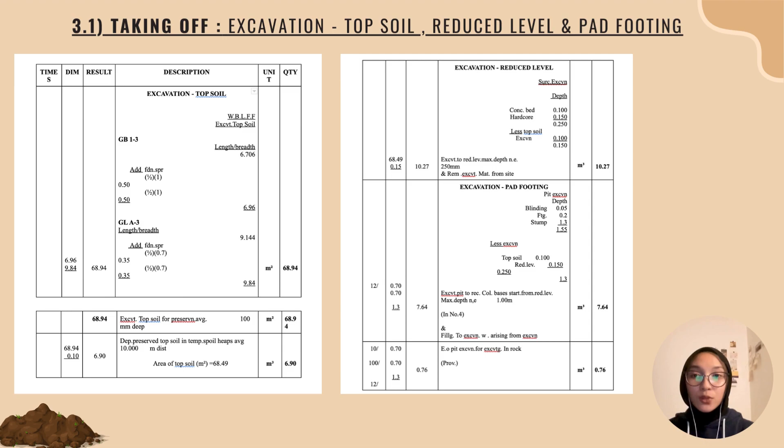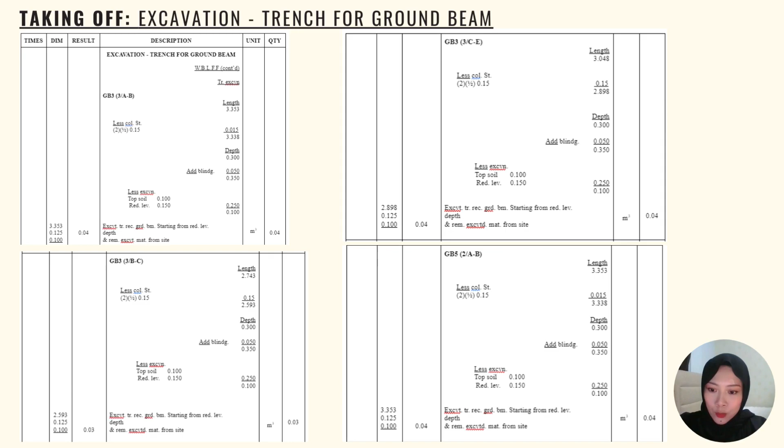Excavation, trench for ground beam. All beam sizes are the same, with width 125 mm and depth 300 mm. The quantity from the first beam, with length 3.353 minus column stump and excavation of topsoil and reduced level, is 0.04. Next is 0.03. Next beam GB3 slash C to E is 0.04 and GB5 slash A to B is 0.04.

Our next beam, GB5 grid 2 slash B to C, with length 2.743, minus column stump, excavation of topsoil, reduced level and blinding, results in 0.03, and GB9 grid B slash 2 to 3 is 0.04. The total excavation for ground beam is 0.22 meter cube.

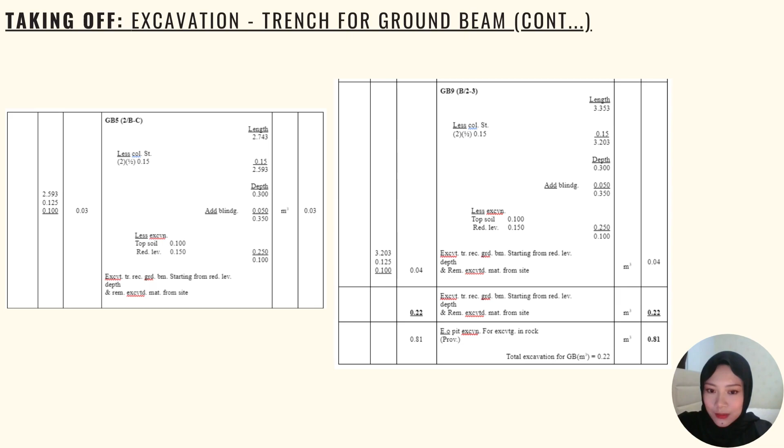Assalamualaikum warahmatullahi wabarakatuh. My name is Muhammad Hafizuddin bin Muhammad Hasbullah, matric number CF200233. I will continue our presentation. I want to talk about taking off for concreting work. First, we must calculate blinding concrete. We use three different dimensions, P1, P2, and P3.

For P1, the dimension is 550 multiplied by 550 multiplied by 200. For concrete grade blinding, we use grade 30, and for the thickness laid on earth, we use 50 millimeters. The result for P1 is 0.24. Next, P2. The dimension for P2 is 700 multiplied by 700 multiplied by 200. We use the same concrete blinding grade and thickness on earth as P1. The result for P2 is 0.39.

Next is P3. The dimension is 1000 multiplied by 1000 multiplied by 200, and the result for P3 is 0.8. Next, we also calculate reinforced in situ concrete grade 20 in isolated foundation base. For P1, the result is 0.05, P2 is 0.09, and P3 0.16. Then we calculate reinforced in situ concrete grade 20 in isolated column stump. The result is 0.35.

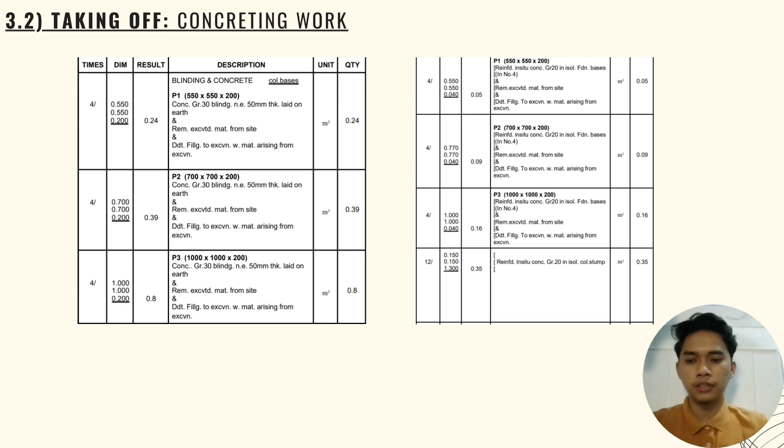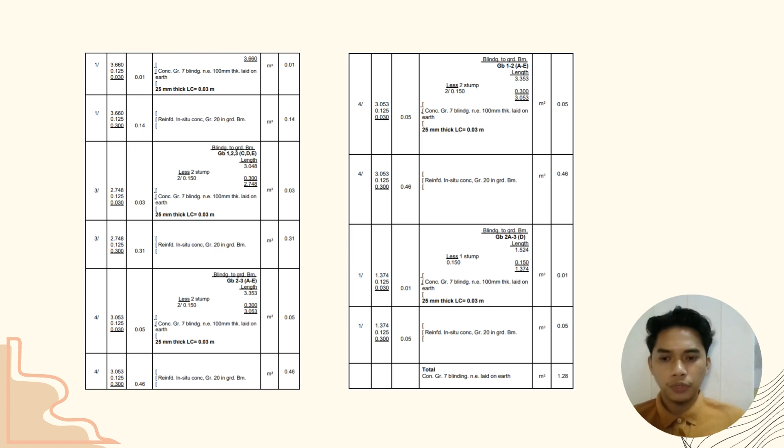Okay, the length for this ground beam is 1.524 less 1 stump, 0.150. So length minus 1 stump, we get 1.374. And then we use 25 millimeter thickness, LC equals 0.03 meters. We get the result is 0.01. And then we also calculate reinforcement in situ concrete 20 in ground beam. We get 0.05. So the total for concrete grade 7 blinding laid on earth, we get 1.28.

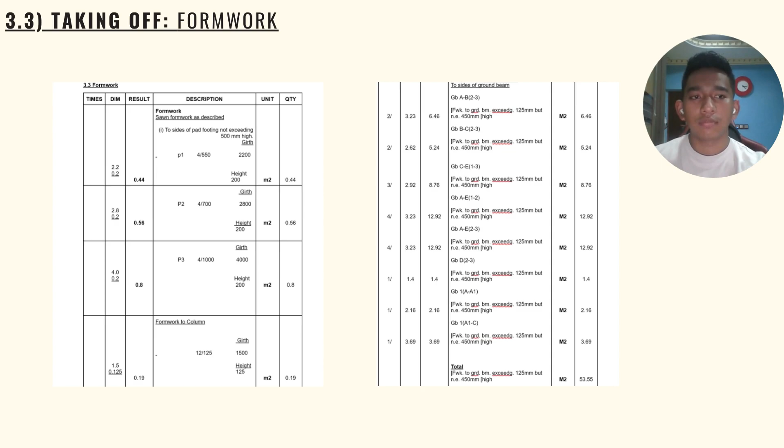So for column, we have 12 columns. So 12 times 125 gets 1500. 1.5 times 0.125 gets 0.19. So we go next for ground beam. The total of ground beam is 53.55.

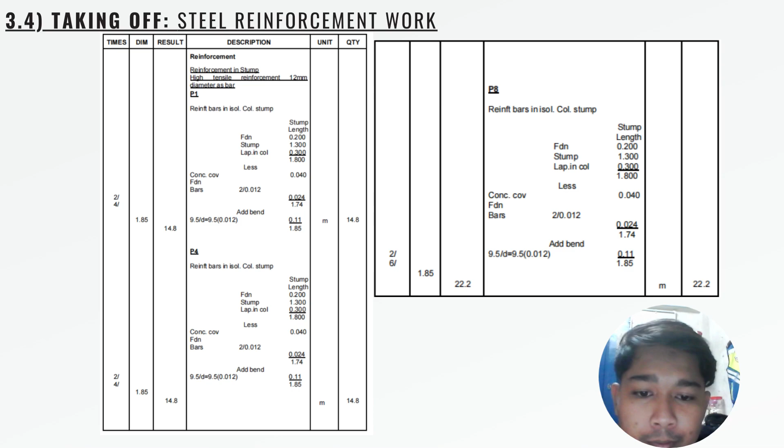Okay, I will continue with taking off steel reinforcement work. Okay, the first reinforcement is reinforcement in stump. For high tensile reinforcement, 12 mm diameter bar. Okay, for P1 we get 14.8 meter. For P4 we get also 14.8 meter, and lastly for P8 we get 22.2 meter. Okay, next for mild steel reinforcement 6 mm diameter bar. For P1 we get 1.86 meter. For P4 also 1.86 meter, and lastly for P8 we get also the same 1.86 meter.

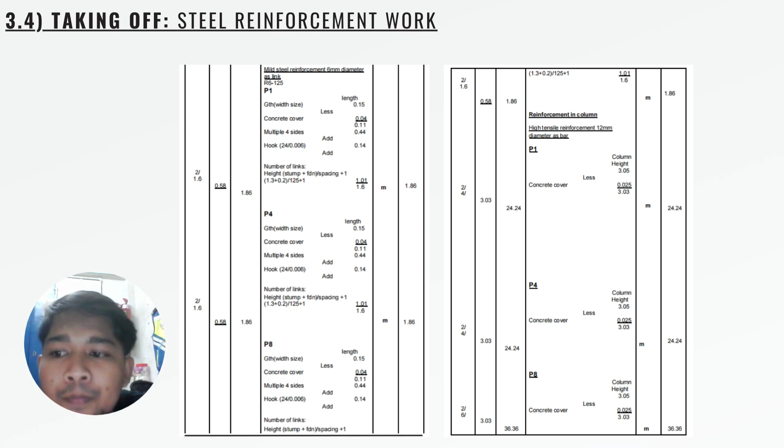Okay, next is reinforcement in column. For high tensile reinforcement 12 mm diameter bar, for P1 we get 24.24. For P4 also the same, 24.24 meter, and lastly P8 we get 36.36 meter. Okay, next, still with reinforcement in column, for mild steel reinforcement 6 mm diameter bar, for P1 we get 8.16. P4, we get also 8.16. And lastly, for P8, we get also 8.16 meter.

Next is reinforcement in ground beam. For ground beam 3, A until E, for that we get 21.06 meter.

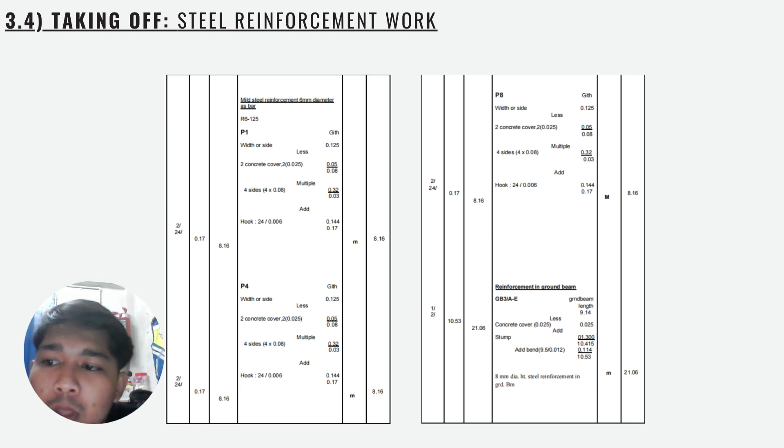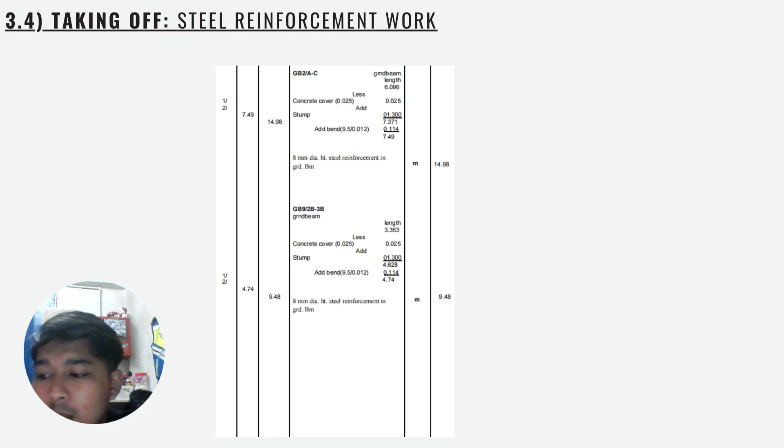Okay, last from me for taking off steel reinforcement work. Okay, I will continue with ground beam 2, A until C. Okay, this is last. We get for ground beam 2 A until C is 14.98, and lastly for ground beam 9 2B until 3B we get 9.48 meter. Okay, that's all from me.

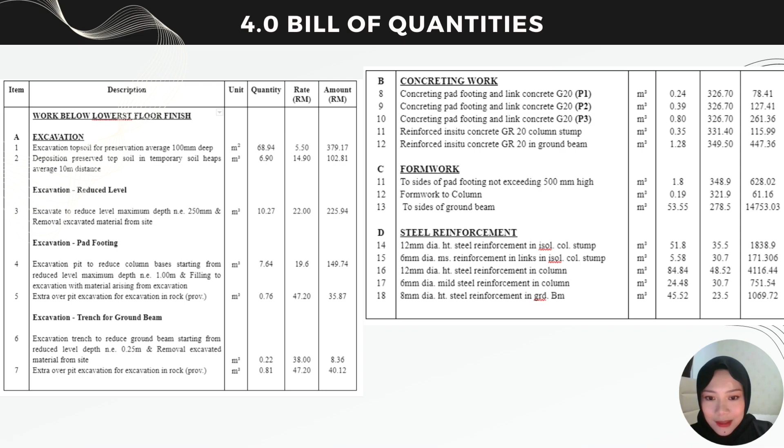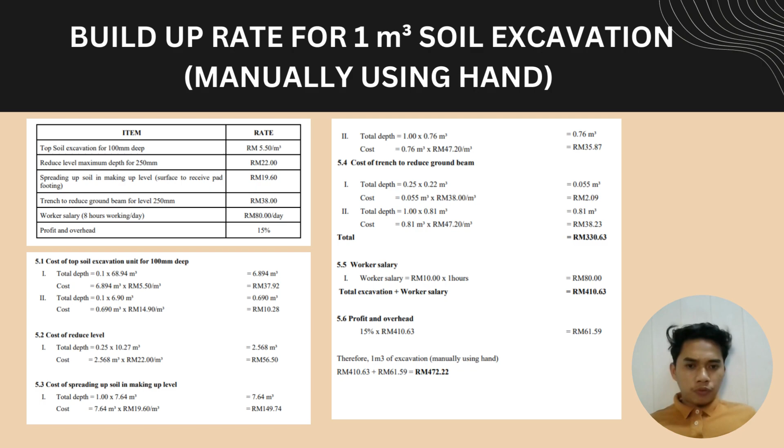Worker salary is RM 10 per hour. So the total excavation plus worker salary, we get RM 410.63. And then we have profit and overhead. So the profit and overhead is 15%. So the 15% multiplied by RM 410.63, we get RM 61.59. Therefore, 1 meter cube of excavation, we get the total is RM 472.22.

And I will be talking about build-up rate, which is a method used in construction cost estimation to determine the cost of various components or elements that make up a particular construction activity or project. It involves breaking down the overall cost into individual items or work items and assigning costs to each component. The general process for performing a build-up rate calculation is identify work items, quantify the works, unit rates calculation, contingencies and profit, and also lastly final estimate.

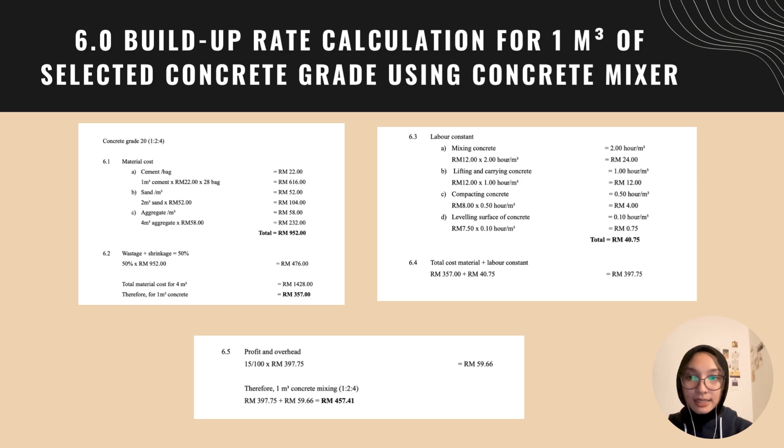It is important to note that the accuracy of the build-up rate calculation depends on the availability of reliable data, the level of detail in the work breakdown structure, and the expertise of the estimator. The process may vary depending on the complexity and nature of the construction project. And this is the total of our build-up rate.

Okay, next I will continue with amount of performance bond. For contract sum, we get 71,878 ringgit 23 cent. And 5% times 71,878 ringgit 23 cent, we will get 3,593 ringgit 91 cent.

Okay, for calculation of liquidated damages, LAD per day. For contract sum we get also RM 71,878 ringgit 23 cent. For base lending rate of RHB Bank Berhad is 6.85%. For LAD, 6.85% times RM 71,878 ringgit 23 cent, we divide with 365 days, and we will get 13 ringgit 49 cent. Okay, that's all from me.